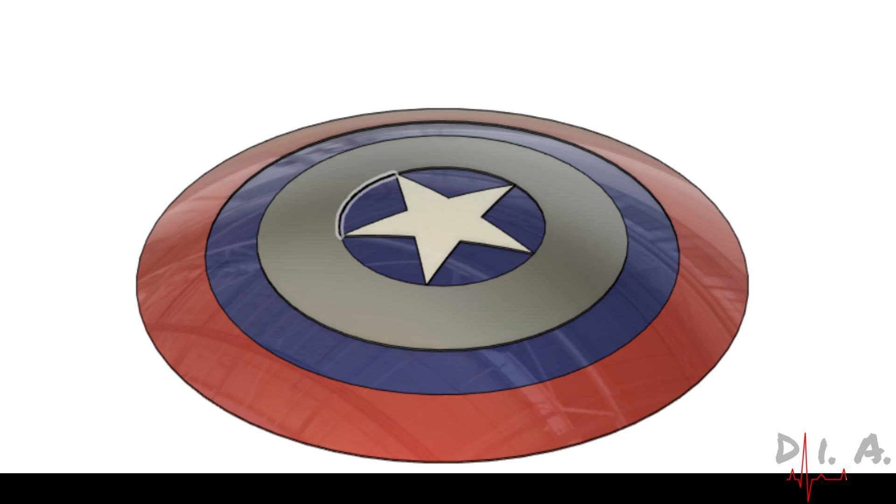Today we'll be doing a 3D model of a Captain America shield. Some months ago I stumbled across a video by Additive Manufacturing Media at the International Manufacturing Technology Show, where they showcased a 3D printed Captain America shield, actually printed in titanium on a Velo 3D printer, and it was quite big.

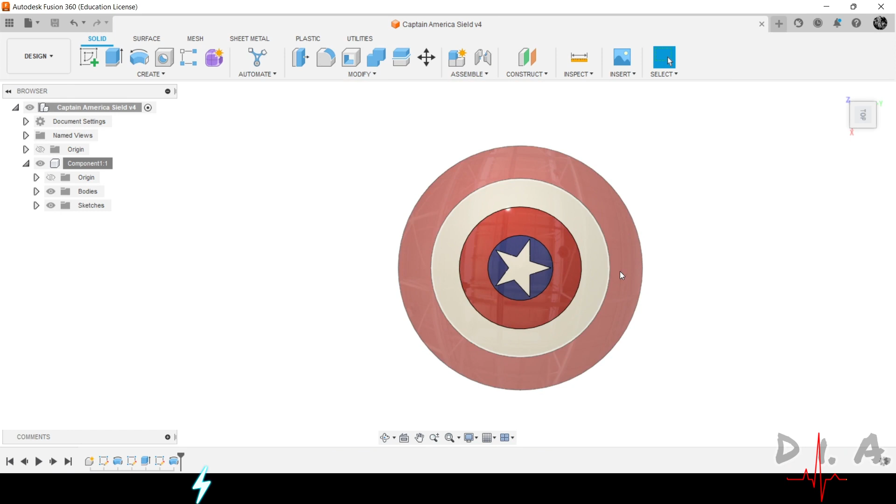So today we'll basically just be doing a 3D model of a shield like Captain America's. So we create a sketch on the front plane.

We'll just draw one half of the profile, and we'll revolve it, and we have our shield.

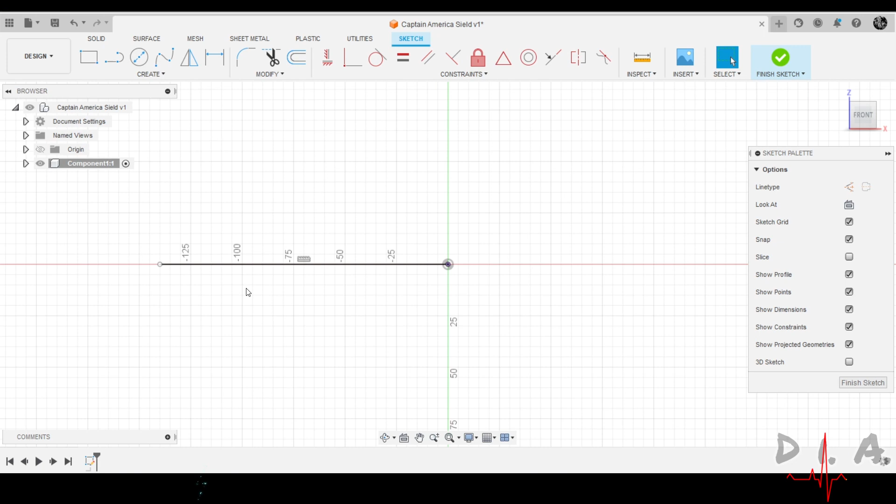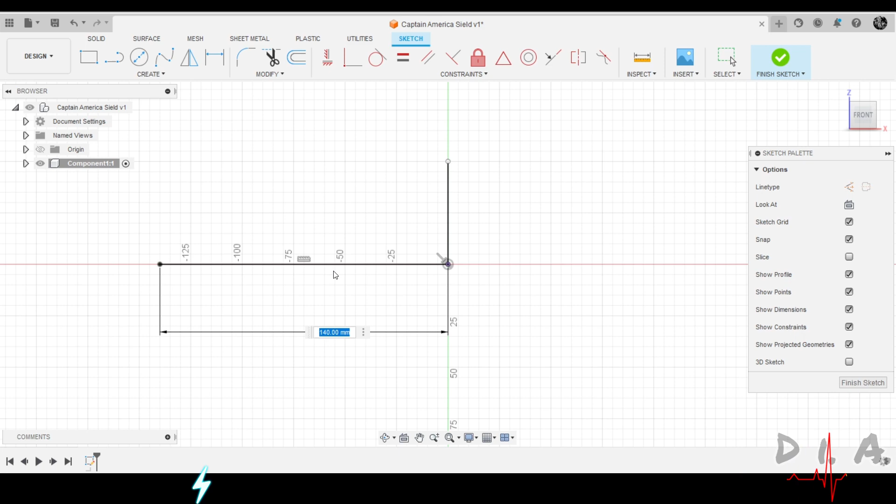Between now and that we have to create our sketch, so we're drawing an arc. Let's make this about 600mm wide, so we'll have this for 300, and that would do.

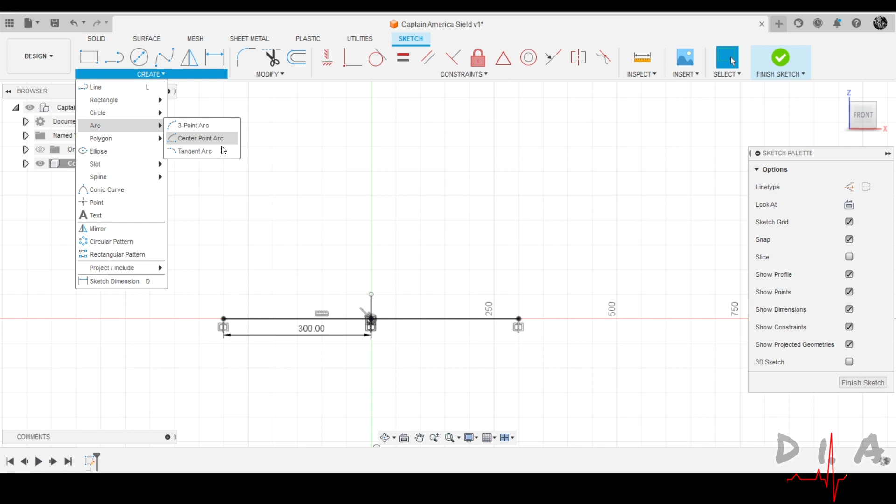I'll have this mirrored because I just want it mirrored. So use a 3-point arc. It's not yet defined - okay, the height, we're using a height of 80.

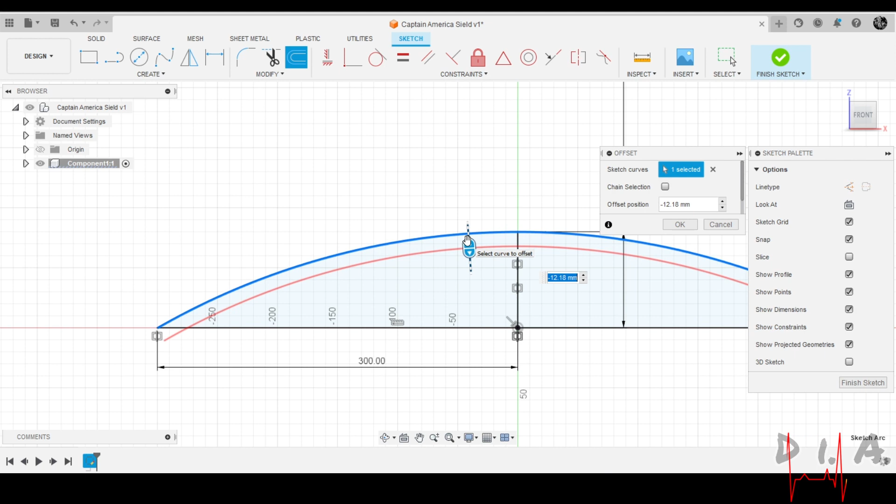The sketch is defined now. Next I'm gonna offset the arc - one offset. Now make it -6.

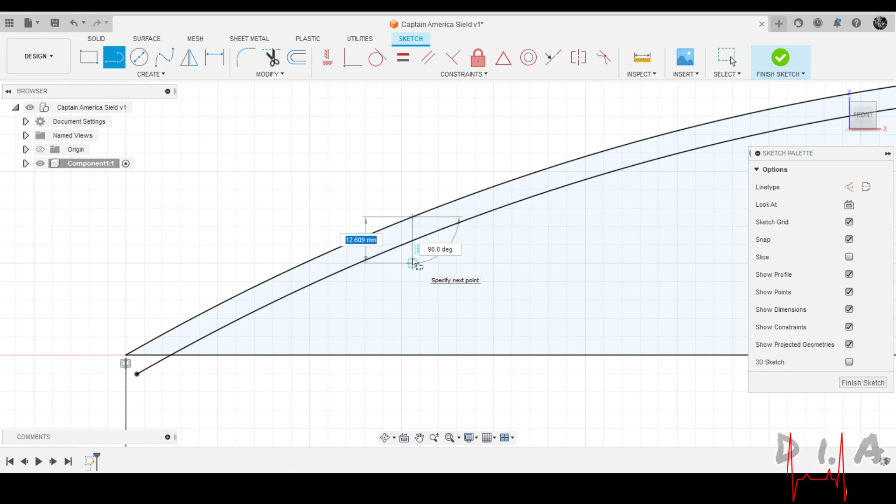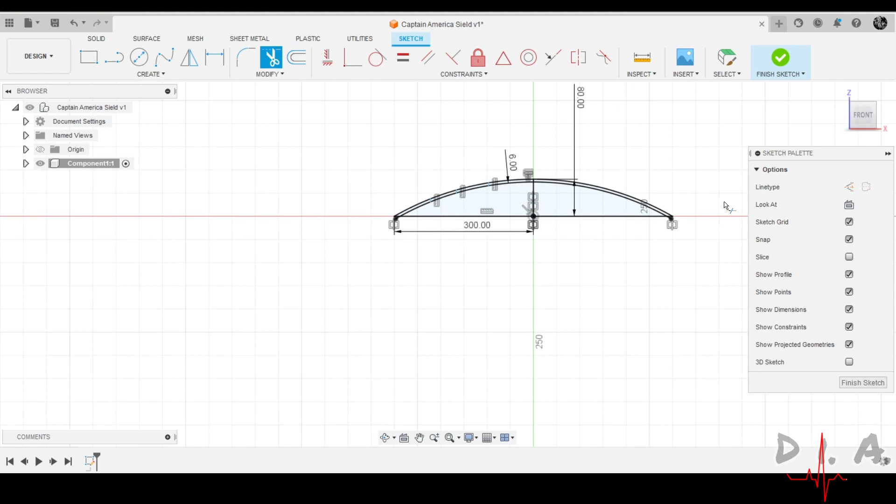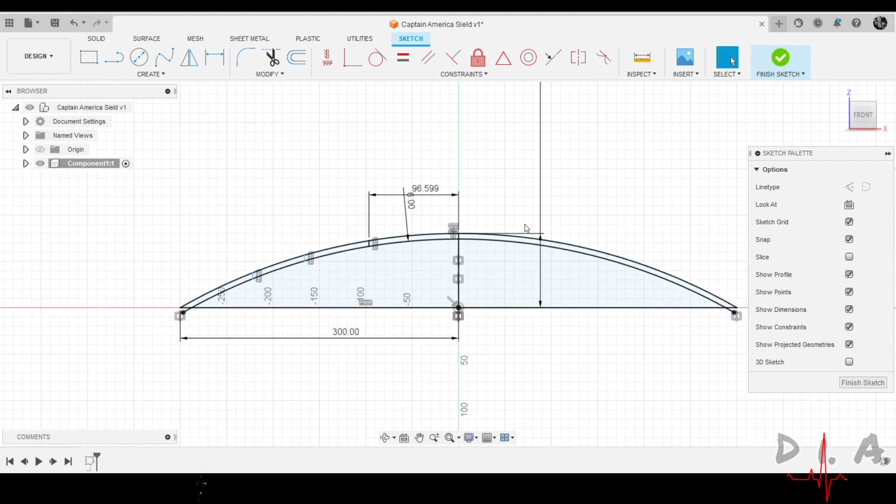So we're creating some little recess on the shield, but not so much. The distance from this to the center, make this... let's change this, let's make it -2. It's just a little recess.

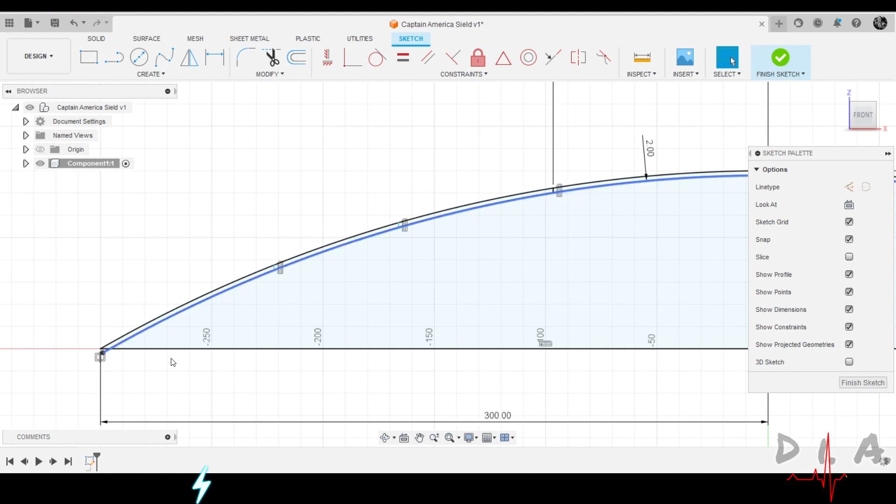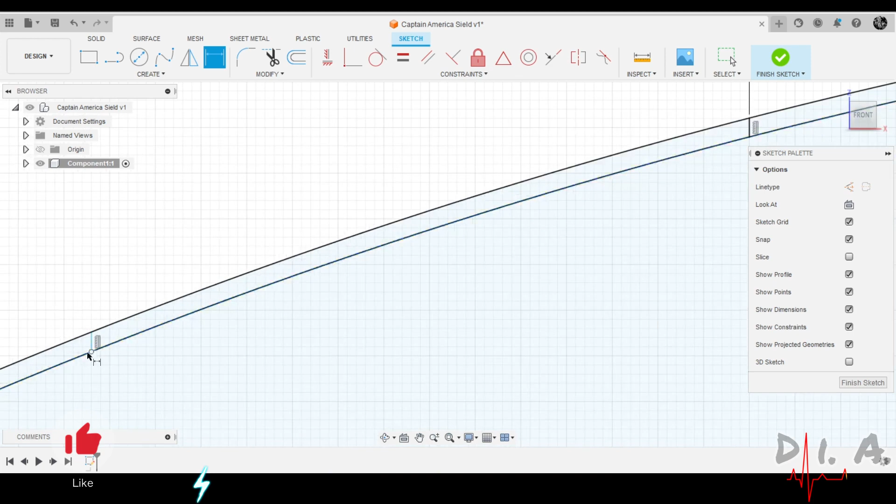We'll do a third offset. Make this 100... I think I'll go with 80, that is fine. Make this 150, and this could be for 220.

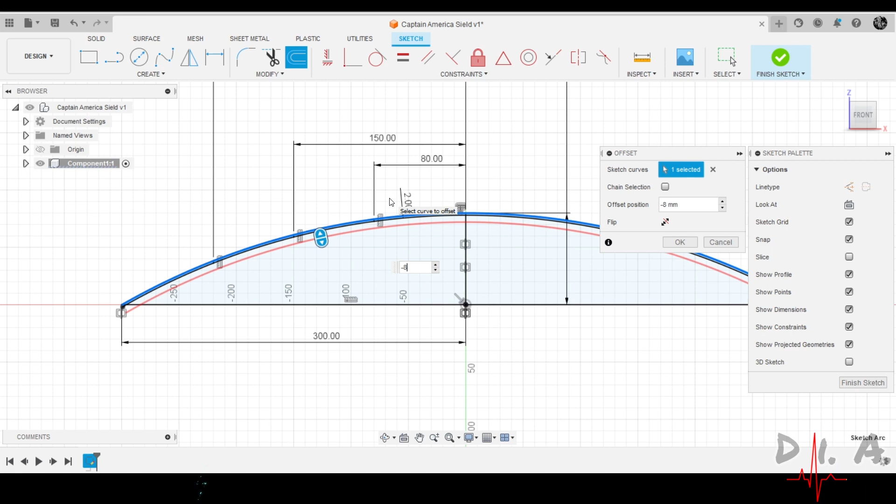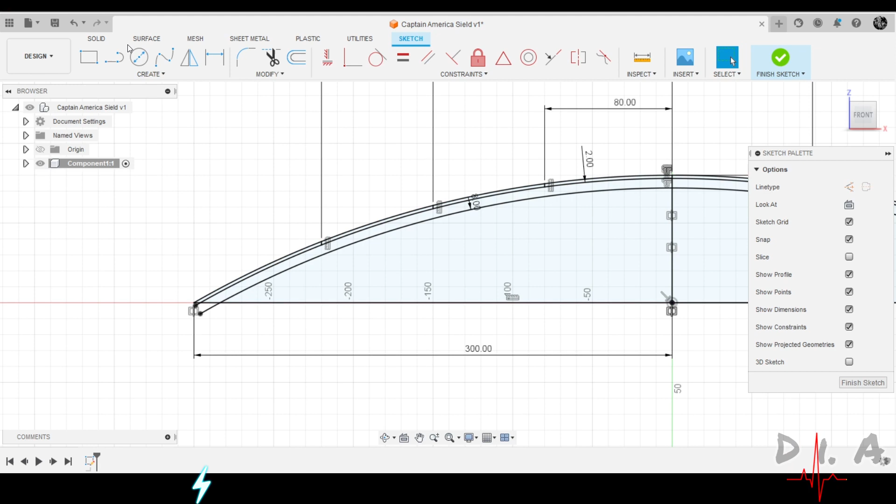So do a third offset, that will be 6mm, and 6, let's make it 8, let's make it 8. So we'll do a sweep - revolve, sorry - that'll give us a sash profile.

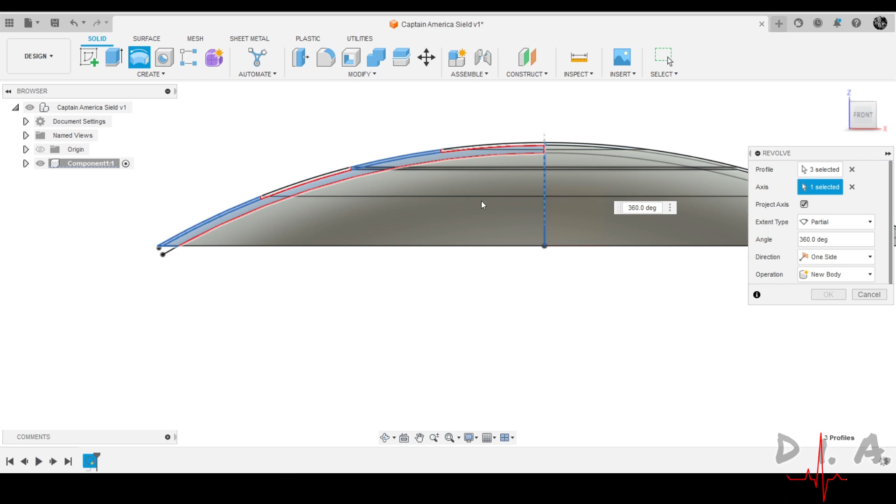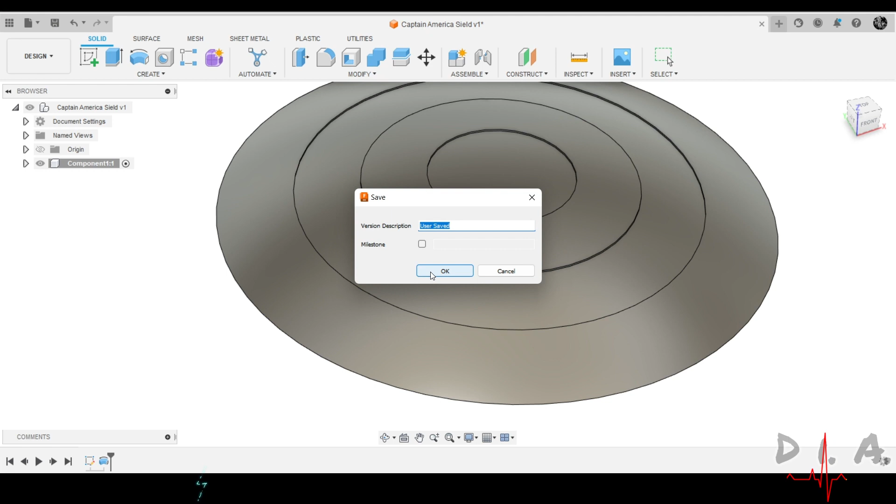So revolve, select this, just hold down control, you can select. So axis, and there we have it - our shield is taking form. There's our shield. It's good, it's good.

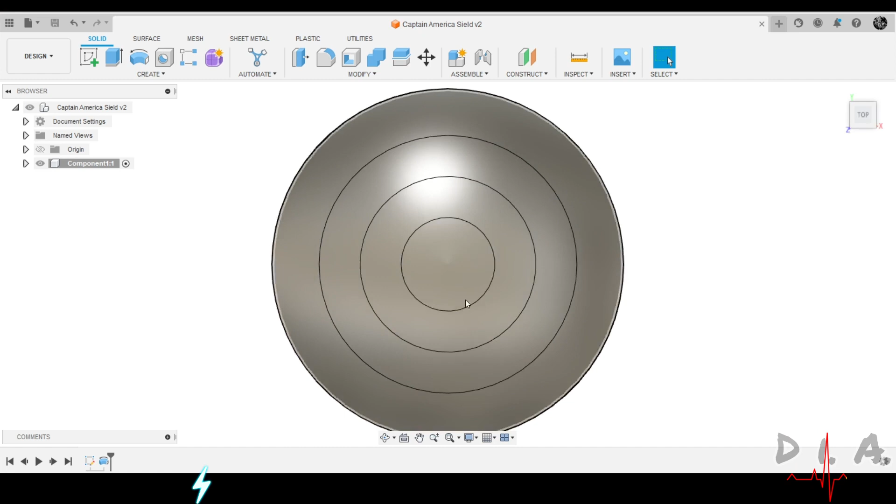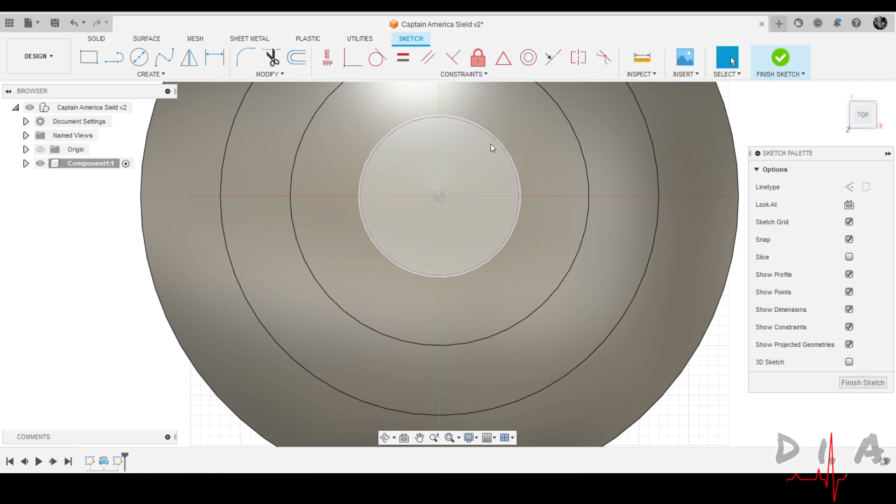Next we'll be creating the star at the center. For extrude, do a project. I don't want to start touching the edge of the inner circle, so we just make the circle less, and 150 is okay.

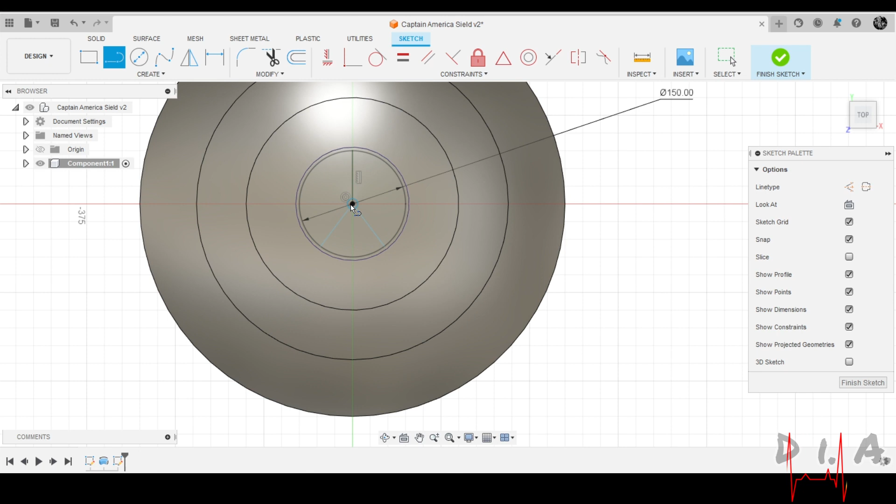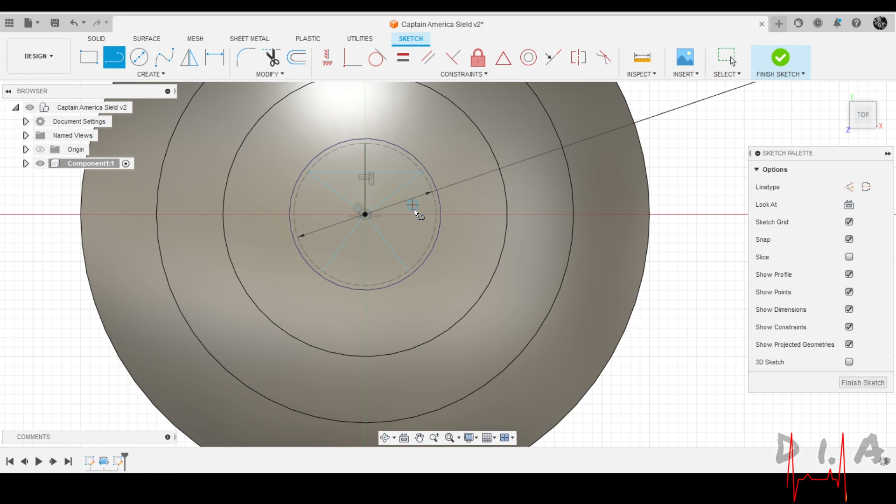Those were the lines representing the vertices of the star. What next? We want to make all sides of the star equal in terms of angle. Sometimes it could be funny or tricky, but if you do the maths, you get it right.

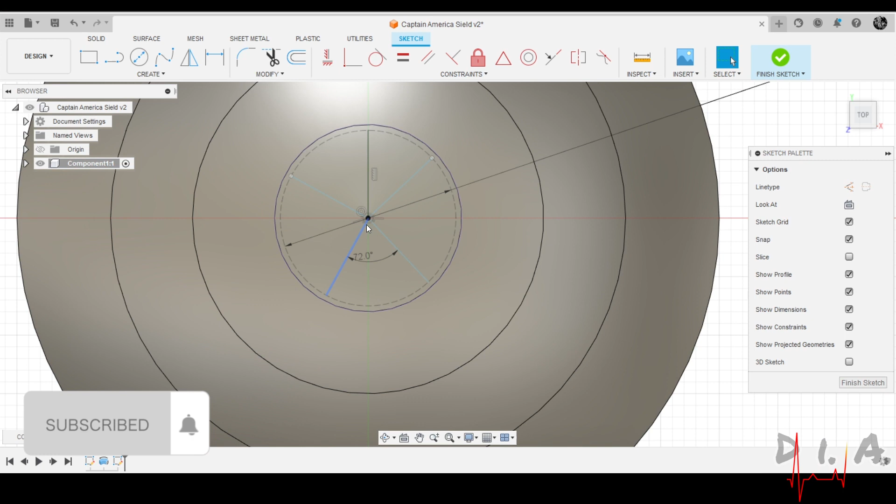The angle each center of each vertex should make with the other is about 72 degrees, so you just have to maintain that 72 degrees between each side of the star. It's about 90, which is not correct, so we believe that - that's supposed to be 72.

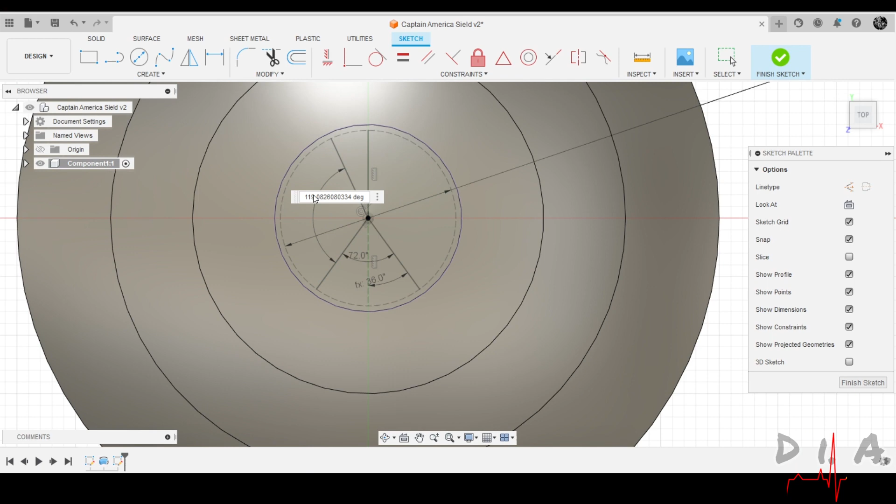I think it's snapping somewhere, let me do it again. Right, just 72.

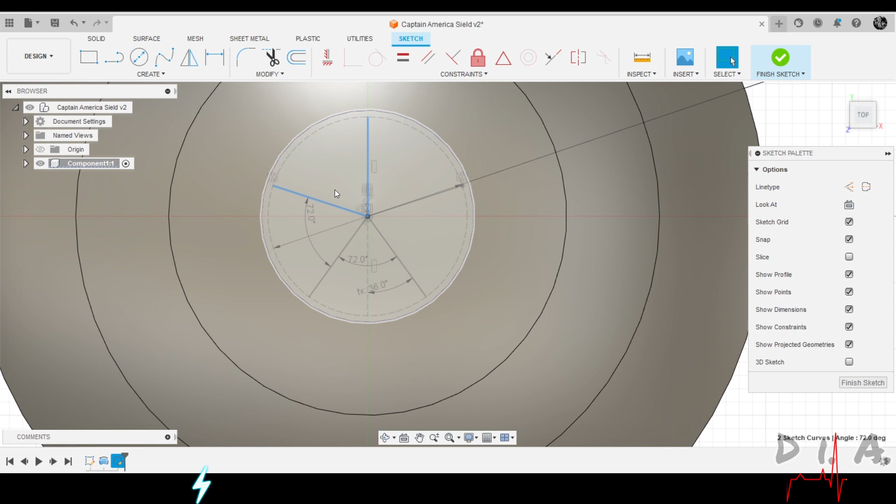So there's the mirror. If we check all of them, you see they give you 72. Okay, so that's just one face.

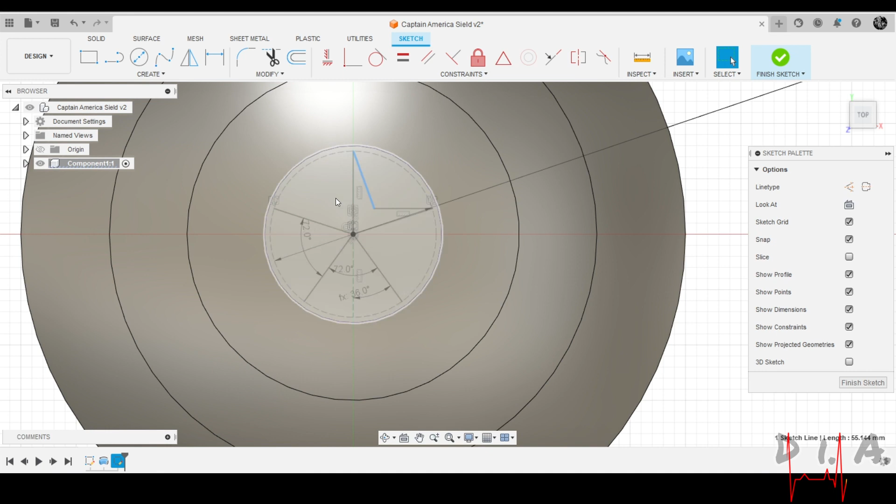So we need to draw a star. That will be about 18 degrees. Do a mirror.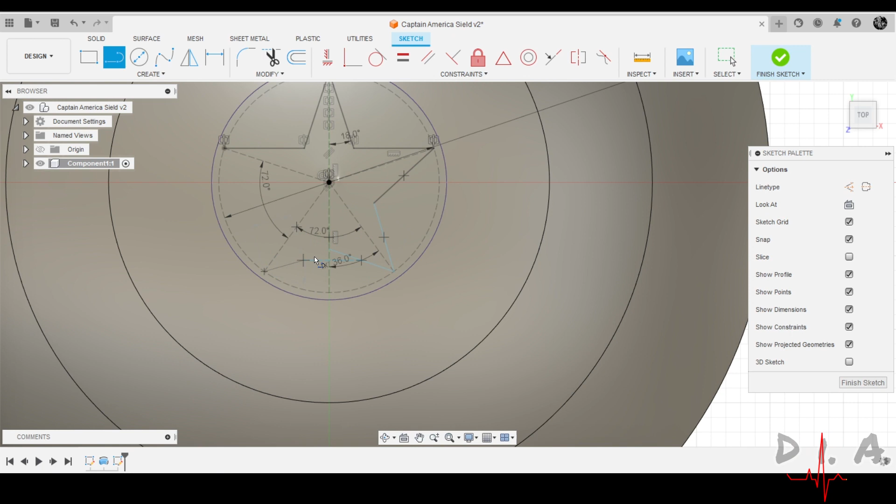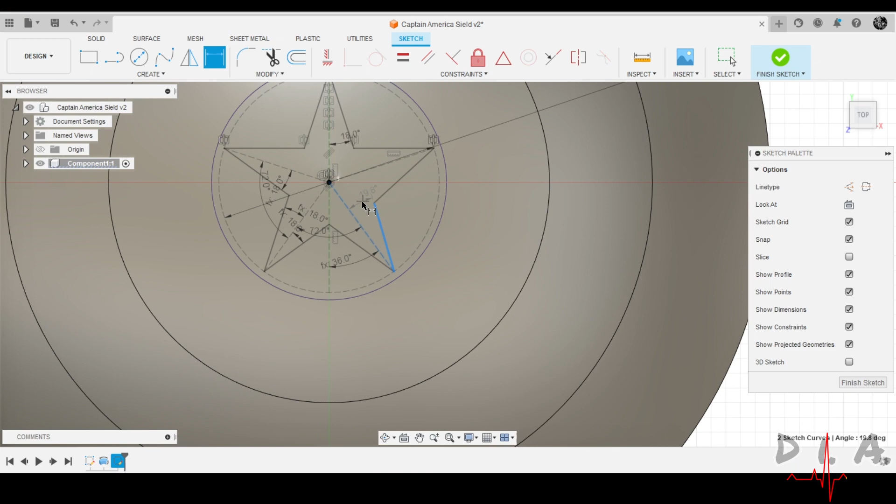And that will be about 18 degrees also. So if you see, I'm selecting the first dimension - the moment I pick a dimension on each side of the stars, whenever I make an update, it would automatically update the others.

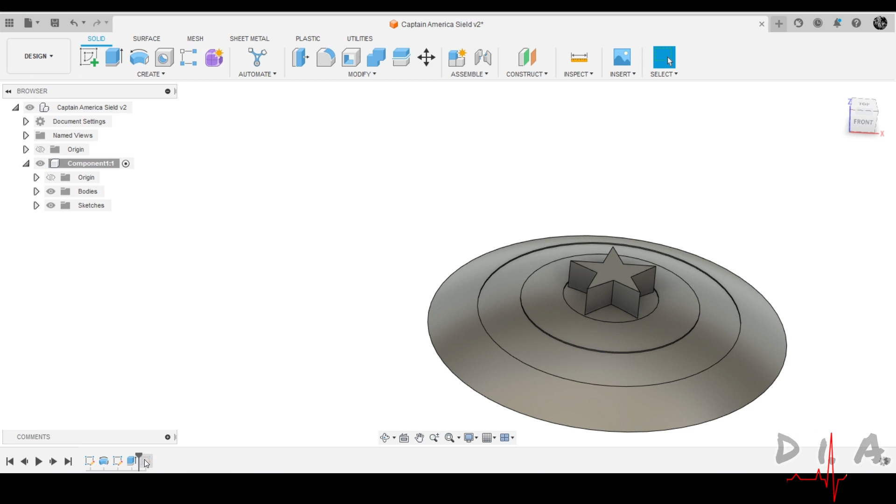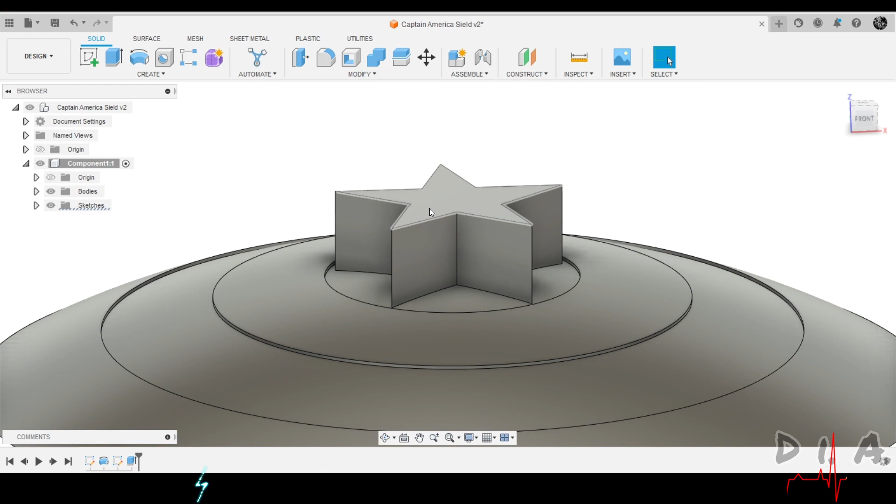So extrude cut, not extrude join. So create sketch - we'll do a revolve cut for this part, so select front plane.

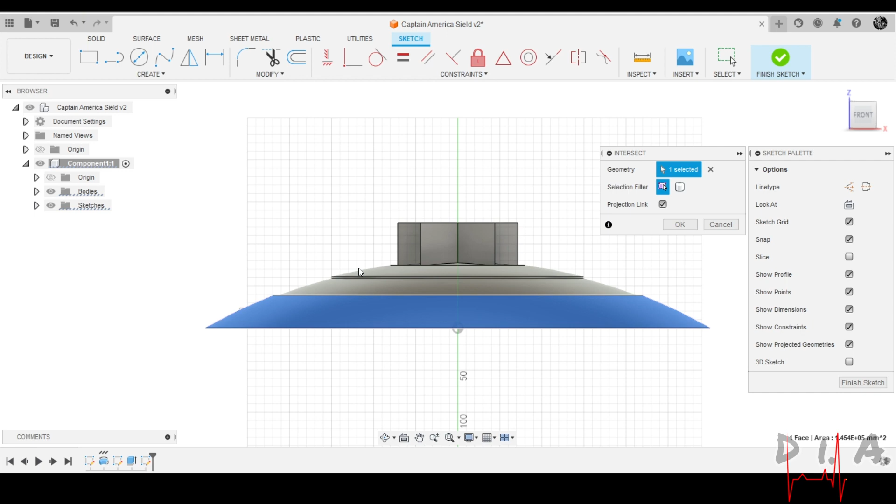Next we would create an intersection which gives us a curve - that curve will take the profile of the shield. I'll hide the body.

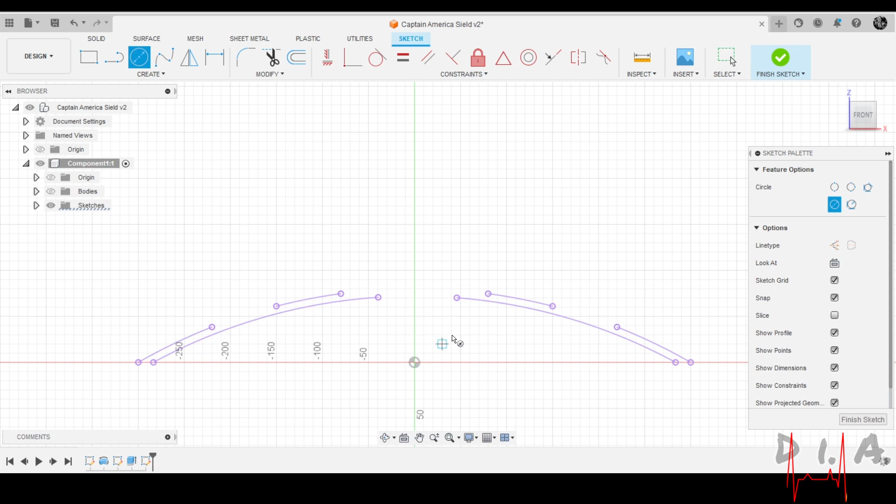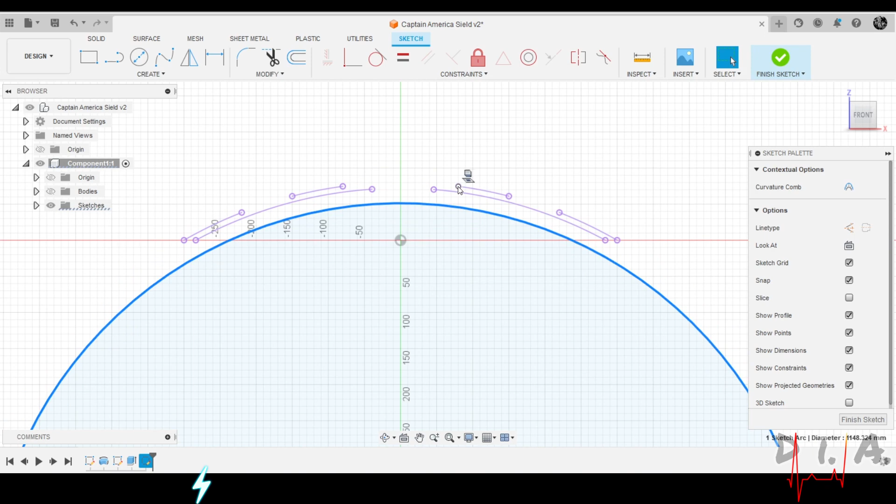So I'll just create a circle. It's not really at the center, but it's just gonna be concentric with this profile - we'll make it concentric so it snaps to the center of those ones. Now we'll drag the circle and make it coincident so it takes that profile.

We'll do the same, or we'll just create a 3-point arc this time - whichever way works for you is fine. 3-point arc, and once it's tangential, you're good to go.

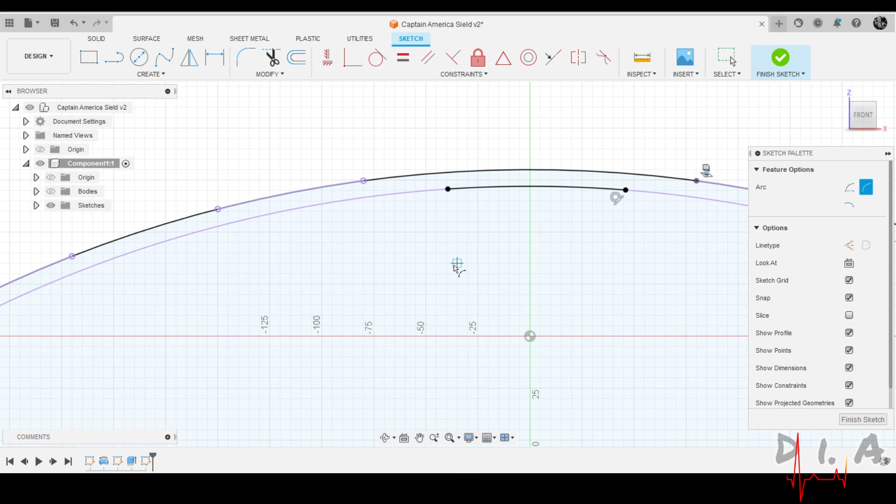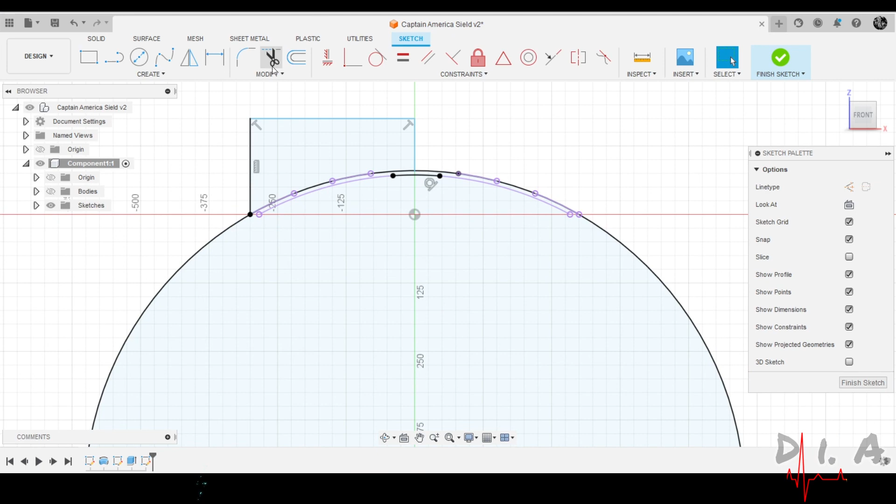Like I said, what we want to do is a revolve cut, so draw a cut profile, trim this out. I just need half of it, so the rest doesn't really matter.

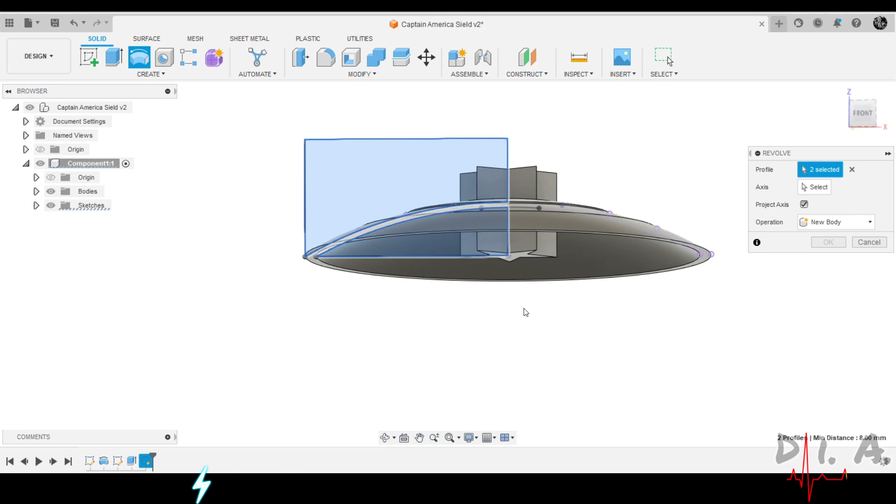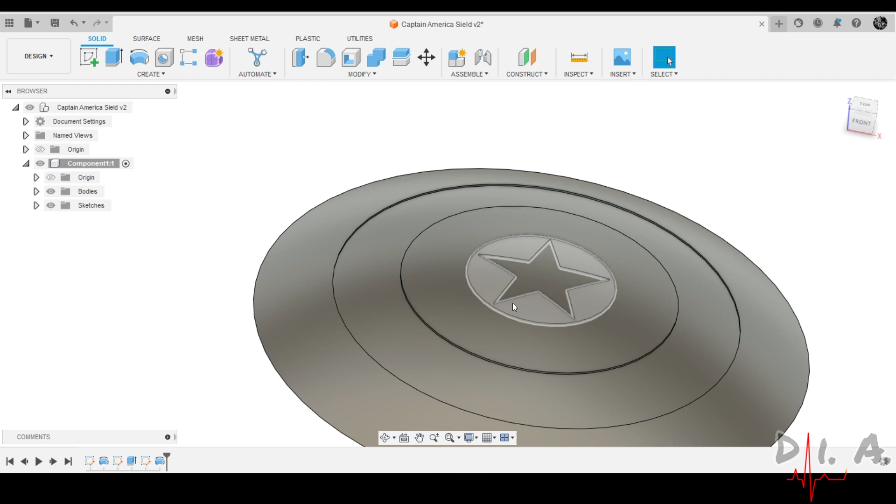The revolve needs a cut profile and a center axis. We'll just hide the body so we can see the center line. So revolve cut there - that's a shield looking all nice and straight.

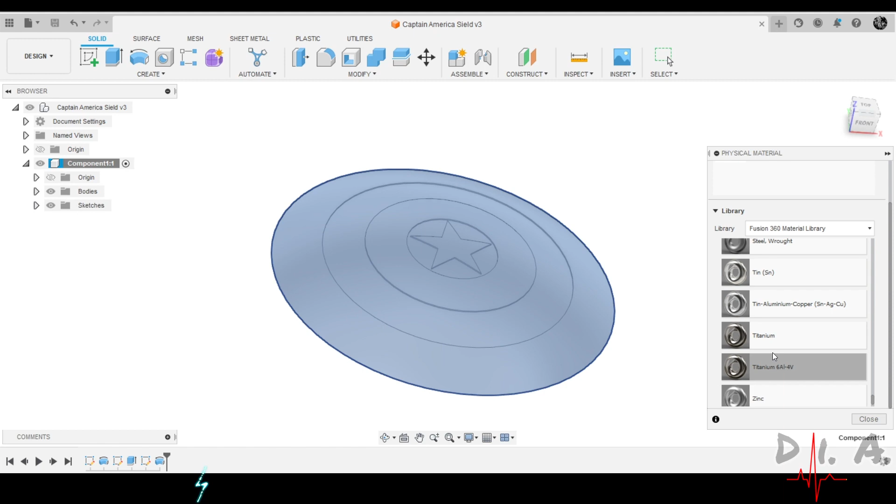So what do we do next? From the one Velo 3D made, since it was printed in titanium, it won't be bad, right? So let's use titanium. I won't be doing the base, that is the handle, in this particular video - I don't know if I'll do that, but the idea is just to do the shield.

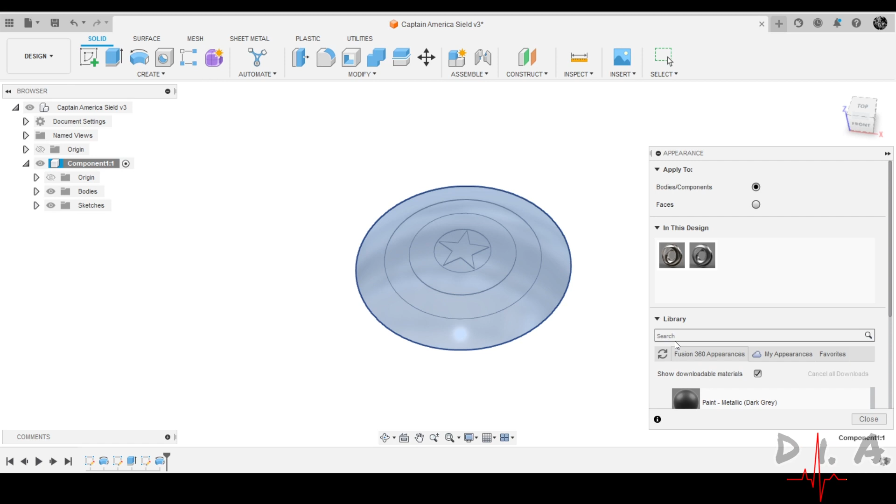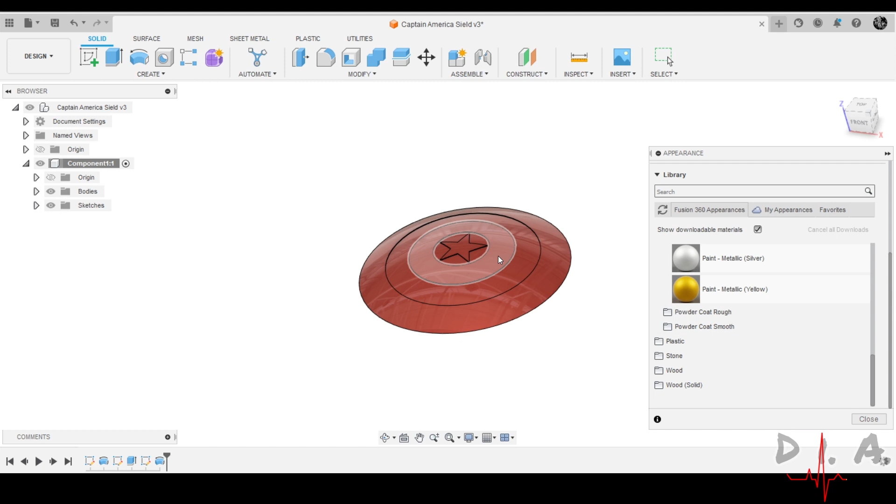So we'll be adding appearance - make this part red. For each segment, just click on the surface of the particular segment you want to change the color, then you drag, select this, then we'll drag the white to it.

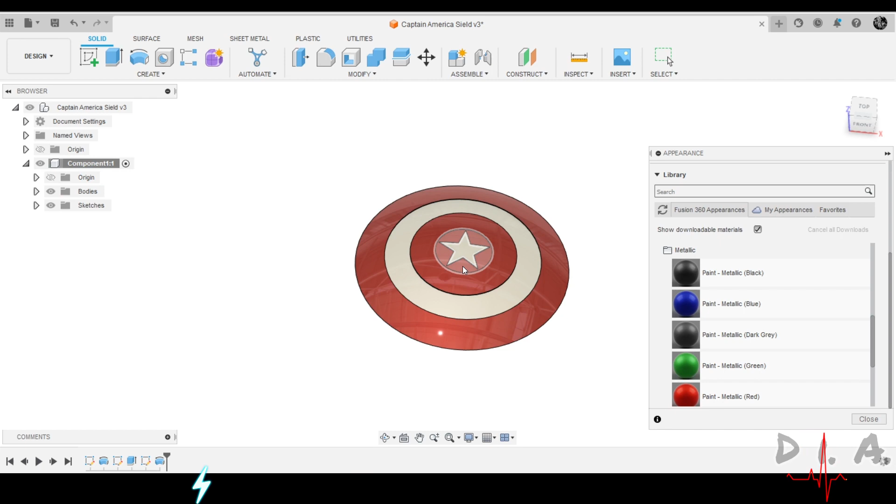So for the center blue, select that first - need to have that selected. Okay, it's selected now, so we'll drag to it. So voila, it looks nice. So there you have it, looking good.

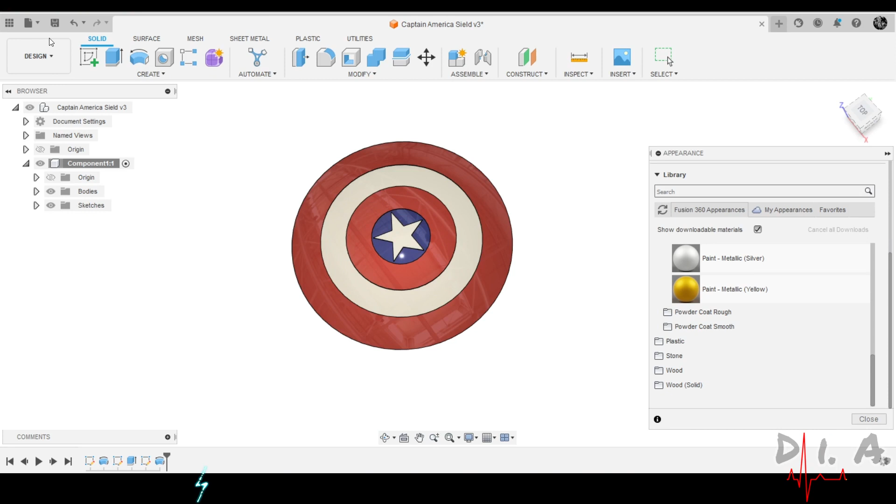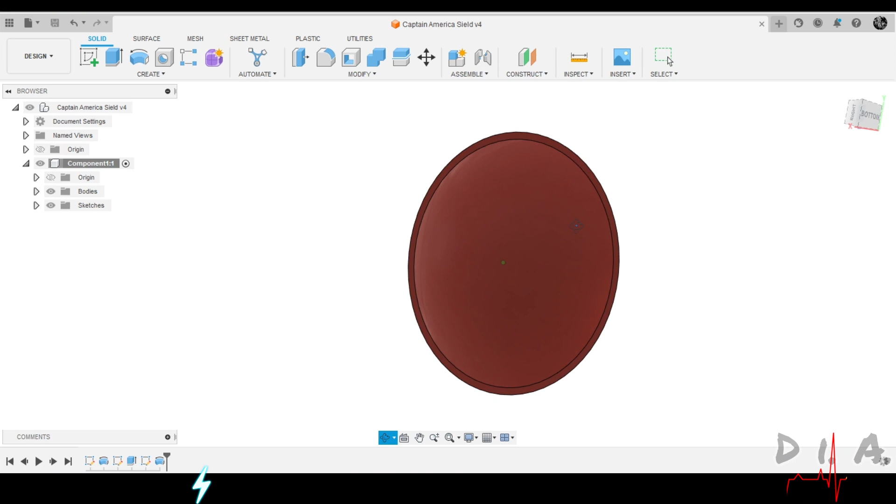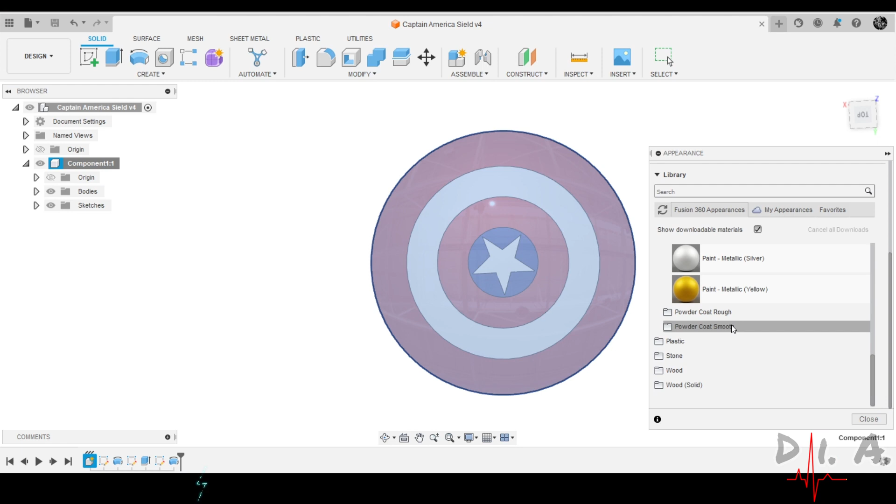So save, and that's our shield. Alright, so that's your Captain America shield. We could have this 3D printed, maybe in metal printing or some other form, FDM most likely, and we'll see how it goes. One of the things Velo tried to showcase was the ability to print without support, so the shield was printed without support. You could see how this model performs with that.